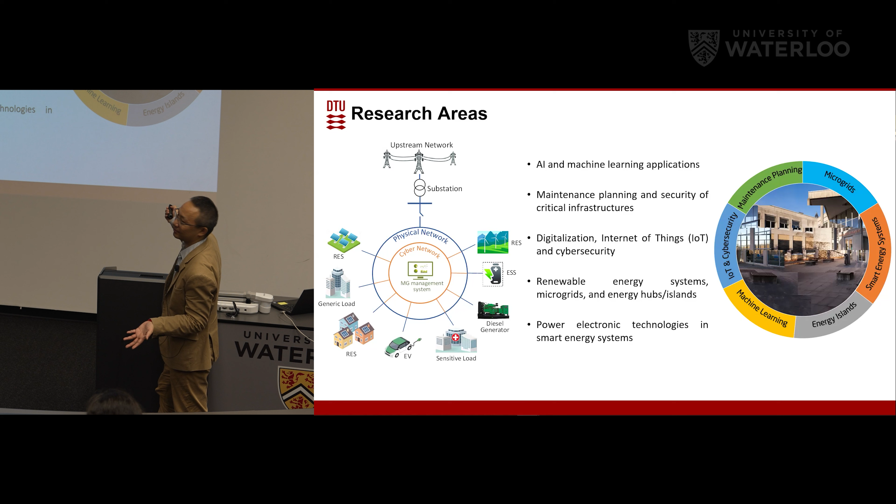For research topics, we are working on machine learning, cybersecurity, IoT, and also energy systems, especially microgrids, power systems, and energy islands. These are some of the topics we are working on.

For Energy Technology, we have 3 labs. One is the power electronics lab. Now we have four 10 kilovolt inverters, we have the DC bus bar and also the AC bus bar. So if you want to do some tests with multi-inverter interaction, operation and control, we can do it on this. This is the future work.

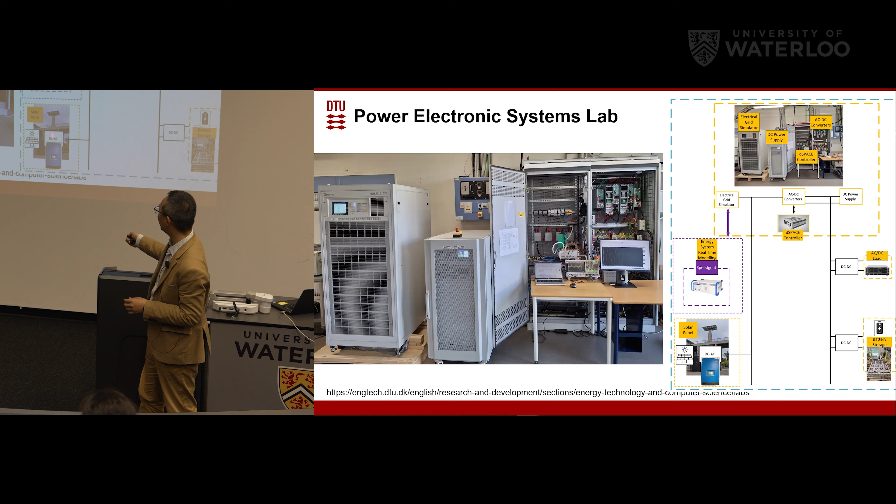We have already set up this platform for these converters, but real-time simulation connecting with them is not ready, though we are planning to do that. That is the PV panel you have seen from the other GIF figure. We plan to connect this PV panel to the grid, and also a storage battery for the bachelor student project, combining them all together as a microgrid to do some tests.

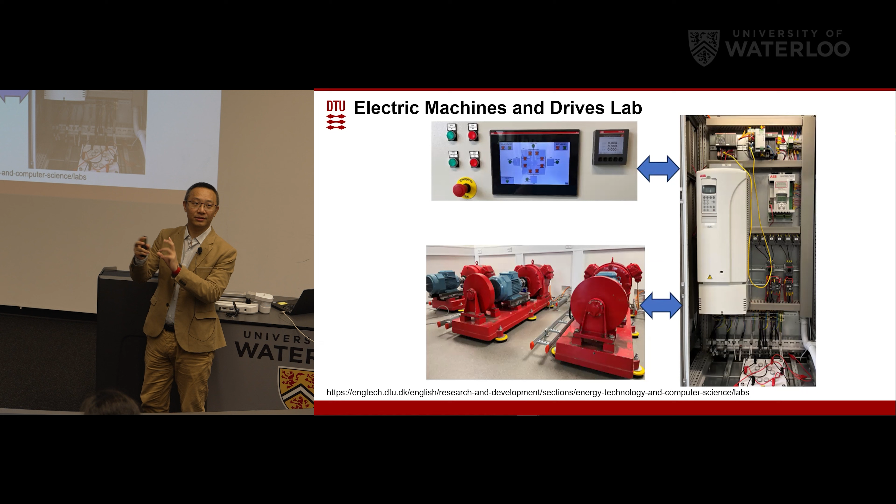Another lab is the electrical machine and drive lab. We have this synchronous machine, mainly for teaching, and the control is from ABB. There are also some small inverters and drive equipment, not shown in this picture, but there are some platforms.

I'm taking over the power system protection lab at DTU in the main campus, where we only have 2 courses for protection. We have some relays from Siemens, but they are all conventional AC system relays, protecting the AC system, bus bar protection, pilot protection, transformer protection.

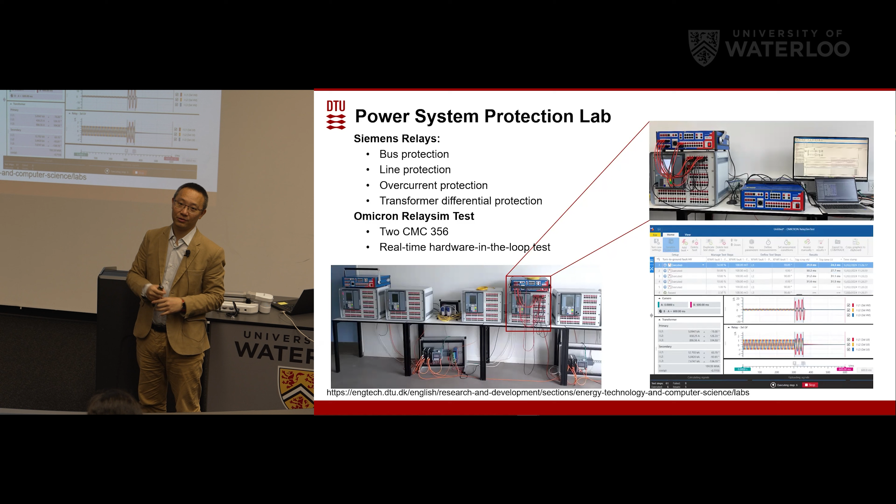We also have this test rig, the Omicron. We can generate the signal and do some tests with hardware in the loop for student projects. For research purposes, I'm working on fault protection for HVDC, but this rig is AC only, so I cannot use it for my research. It's mainly for teaching, company tests, and master or bachelor programs.

Now let's focus on the topics of this presentation. It's not very detailed, specific technical research issues, just the broad picture of offshore wind and HVDC in Europe.

So the first part is the driving force. Why do we need HVDC and wind? Because we want to achieve net zero emission.

In Europe, the UK is the first country, one of the major economies in the world, to launch a 2050 net zero emission target. Net zero emission means you are producing carbon and consuming some carbon, for example through forests or carbon capture techniques. The EU's target is higher than net zero emission - climate neutral means human activity is not affecting the climate. This is much higher.

For other economies, for example China, they want to achieve carbon peak by 2030 and carbon neutral by 2060. The reason is they are still booming their economy, so carbon dioxide emissions are still high. By 2030 they can reach the peak and then decline.

But actually we cannot achieve net zero emission because consumption is still too high. So in the future we have carbon tax - for example Brazil has a lot of forests, the Amazon, and we can use carbon tax credits to achieve carbon neutral. So these are the differences, and India is going to achieve it by 2070.

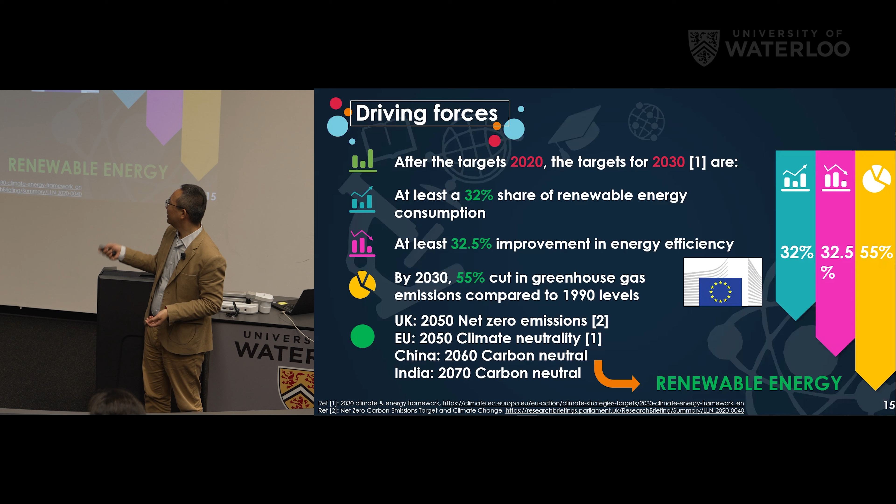So how to achieve it? Use renewable energy. The EU has made a lot of efforts on this - by 2030, at least 55% cut in greenhouse gas emissions compared to the 1990s. And now we have Trump, so we don't know what will happen in the US - maybe they will quit the Paris Agreement again.

For wind in Europe, every year the wind energy organization launches a new report. I keep tracking these reports and updating these slides.

Now in the EU, offshore and onshore total is 272 gigawatts. You can see the total power consumption share from wind is increasing, but we want to achieve 100%. It's still quite low. However, if you check the total electricity consumption, it's declining, so this percentage is increasing. They are compensating because recent years the economy is not very good, so total electricity consumption is not too high and is declining. That's the reason this share of renewable energy is increasing.

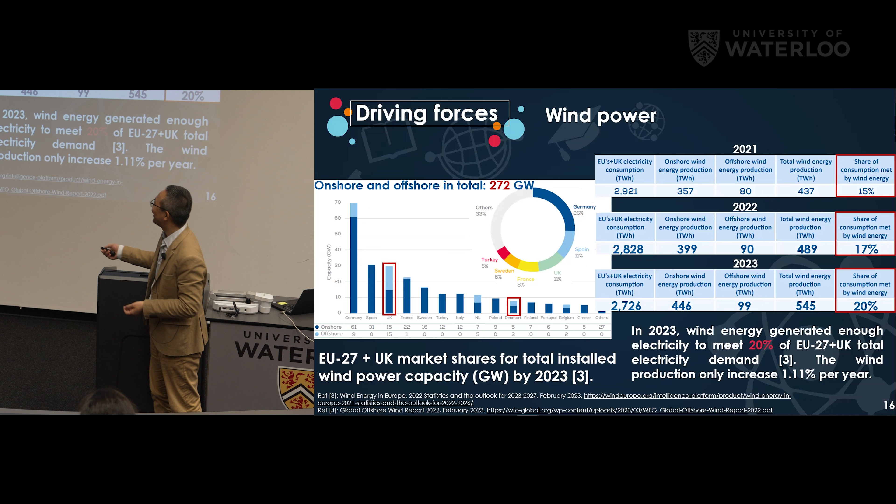Originally this was 28 countries. Since 2016, the UK became independent - we say this is offline or off-grid operation. Now it's 27 plus UK. So you can see they are far away from achieving 100% renewable energy.

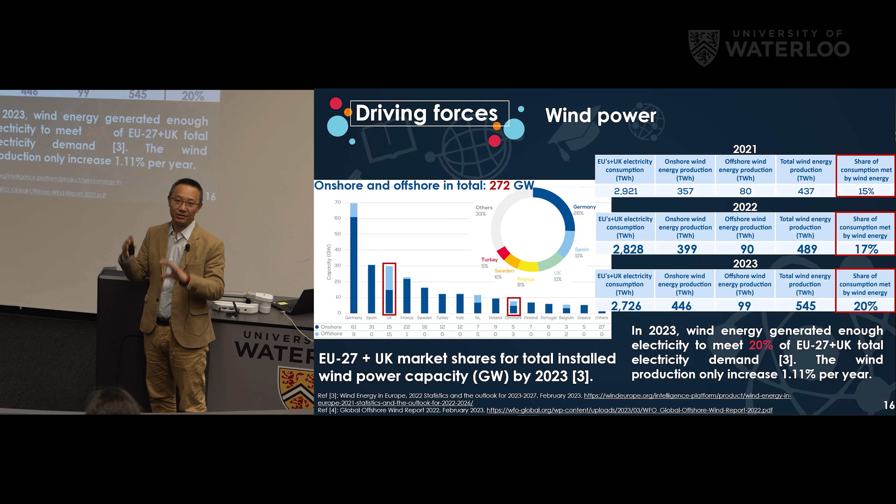In Europe, the weather is not very good. For example, in Denmark, it's always cloudy, so PV is not as prevalent compared to wind.

I think since you are in the ECE department, you know why we need to use renewable energy. But why do we use offshore? Because the wind speed is higher and much more stable.

We can use coal or gas because they are controllable - we can start up or shut down these power plants quickly. But for wind, we cannot control them; we have this problem of intermittence. So if we build offshore wind farms in the sea, we can have higher and more stable output. This is good for our power system engineers.

But the problem is we have so many disadvantages. The cost is still very high, and reliability and manufacturing difficulty is much higher compared to onshore. All these components should be redesigned for the harsh environment in the sea.

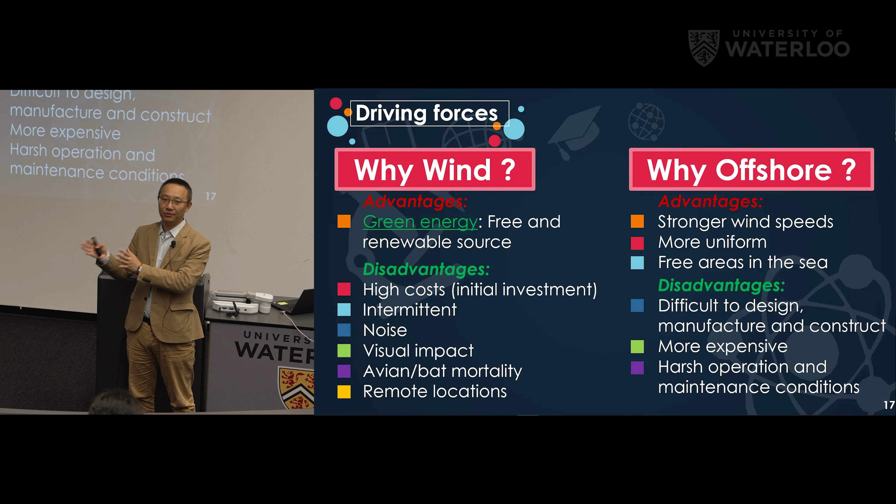Also in Europe, the land is very limited, so we want to build in the sea because that area is free. Even though we have some fishing areas, somehow we can avoid those areas to find a location to build offshore wind.

We want to achieve 100% renewable energy, net zero emission. If we build a lot of wind turbines, we also consume power and produce carbon. Based on the Danish Ministry of Energy, about 90% of materials can be reused. After half a year or one year, we can achieve carbon neutrality - meaning the energy produced by the wind turbine is equivalent to the coal or gas that would have been consumed to generate the same electricity. This one can be neutral. So in this way we can have whole lifetime carbon neutrality.

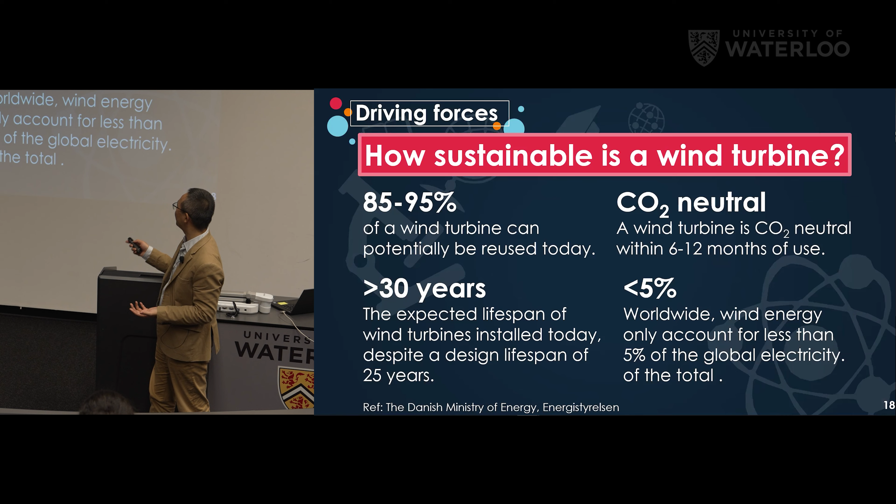Also here is the data - only 5% of global consumption is from wind. So you can see we have very good opportunity and a lot of challenges for us to increase it.

So how can we grab the power from offshore to onshore? Conventionally we use AC, alternating current. But if you've attended power system analysis, we know that with two terminals, two machines, we have the equation P equals V1 times V2 divided by X, times sine theta. If this X, the impedance of the cable - especially for submarine cables - is too large, then P will be reduced.

So we cannot transfer as much power as we want - we have the transfer limitation of AC. How can we solve it? We can use this method for the Hornsea 1 project: we put a reactive power compensation station in between. This reduces that X and increases the distance - over 100 kilometers.

Before 2023, this was the largest one in the world. Hornsea 2, from last year, is now the largest one. It used 174 Siemens Gamesa 7 megawatt wind turbines.

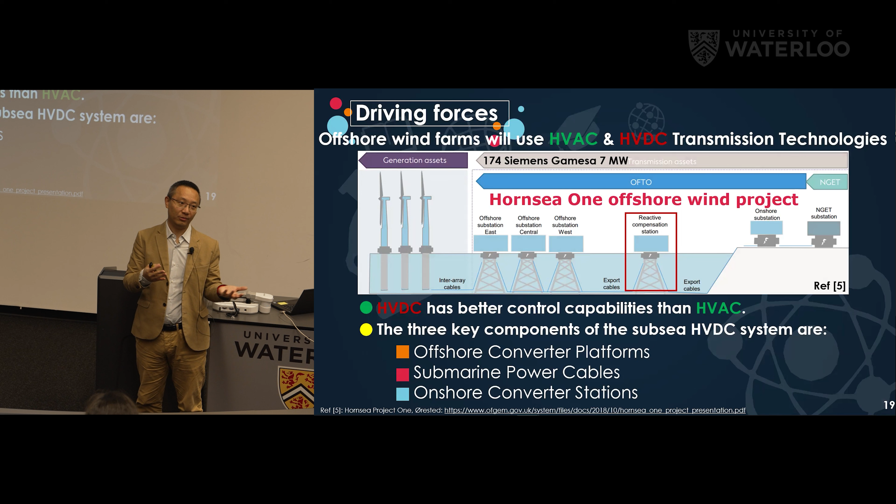The reason they use AC in the UK is that they assume HVDC is not too mature yet. So we are still relying on AC because it has been used for many decades - it's much more mature and reliable, even though it somehow increases the cost. Another way is to convert from this AC sine wave to DC.

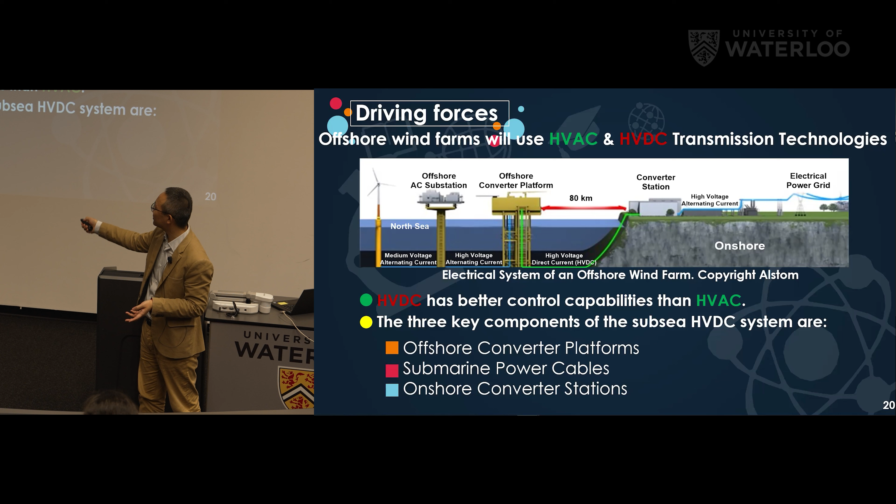If you read some reports for this offshore application, if the distance is over 80 or 100 kilometers, DC is better in terms of cost, losses, and control flexibility. So we convert from AC to DC, and then DC to AC again to supply the conventional AC system. That's the main cause of HVDC, high voltage direct current - we need to use this large HVDC converter station in the sea and also onshore.

So there are many projects in Europe. For example, this is the ongoing one with UK and Morocco - they want to build a 3,800 kilometer HVDC link from Morocco to UK through submarine cables. This is a crazy idea. But originally there was another one called Sun Cable, from Australia to Singapore, which would be more than 4,000 kilometers. But this one is postponed already.

But the Morocco-UK one is still ongoing. Some of our friends are working for this consultancy company and the National Grid UK - they are still working on these projects. Yes.

And then some cases in Europe - UK is the largest market in the world for offshore energy systems. So since...

1990s, they launched this round 1, 2, 3 scheme. Each round is 10 years - they started to build pilot wind turbines on the seabed, small wind turbines for offshore wind application, and then gradually increased distance by the 2000s. They already have some long distance offshore AC-based wind farms. So they want to achieve net zero, which means they need to build a lot of wind turbines.

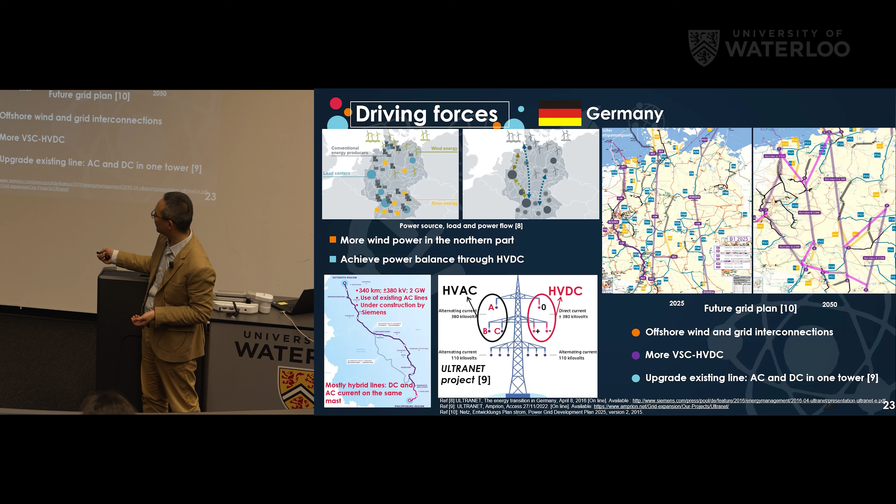But this project, UltraNet, was planned in 2013 when I started my PhD. But until now it's not commissioned yet - they promised to commission it in 2026, okay, 2 years more.

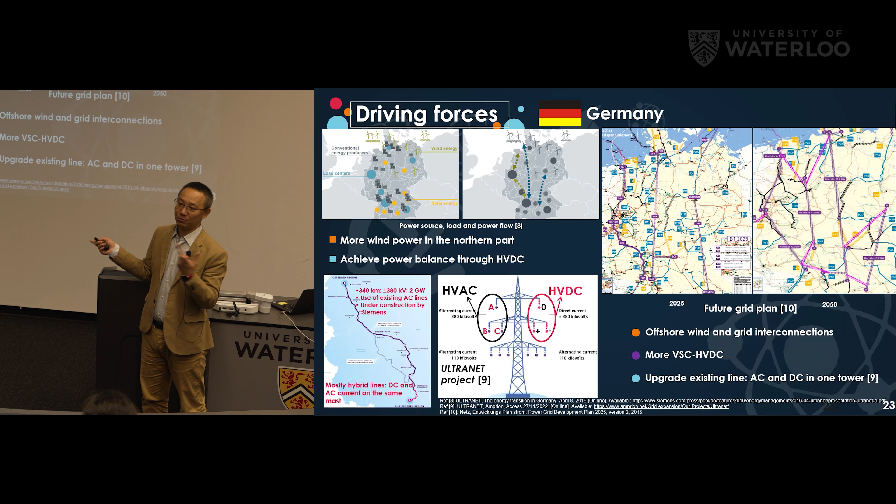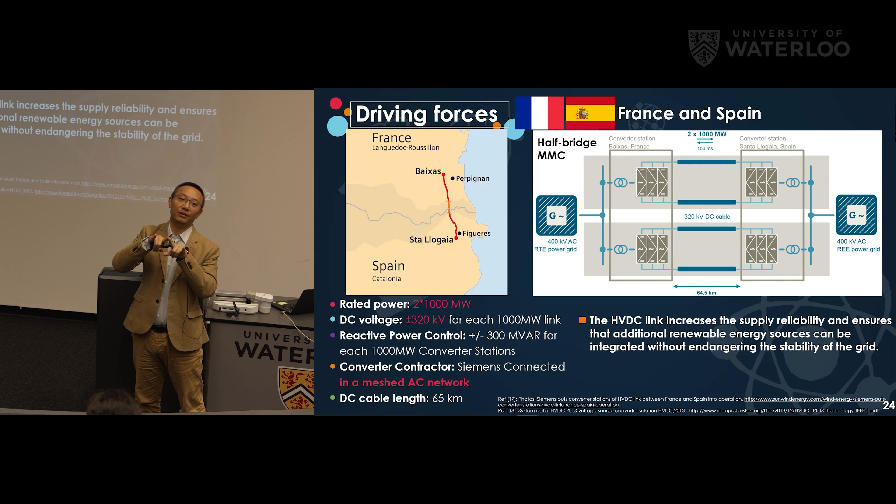And then France and Spain - this is one example in the early stage. For this project we have a 2 gigawatt transmission requirement, but at that moment this HVDC cable could not reach more than 1,000 megawatts. So in this way they built 2, 320 kilovolt cables in parallel operation. But now we can have this bipolar configuration - directly use one pole, another pole, and remove the other 2 poles, so we can reduce the cost. But at that moment that was challenging.

And this was the first AC system embedded HVDC link. So you can see this is not connecting from this offshore wind farm or renewable energy, PV or wind - they are embedded between 2 AC grids. Yes.

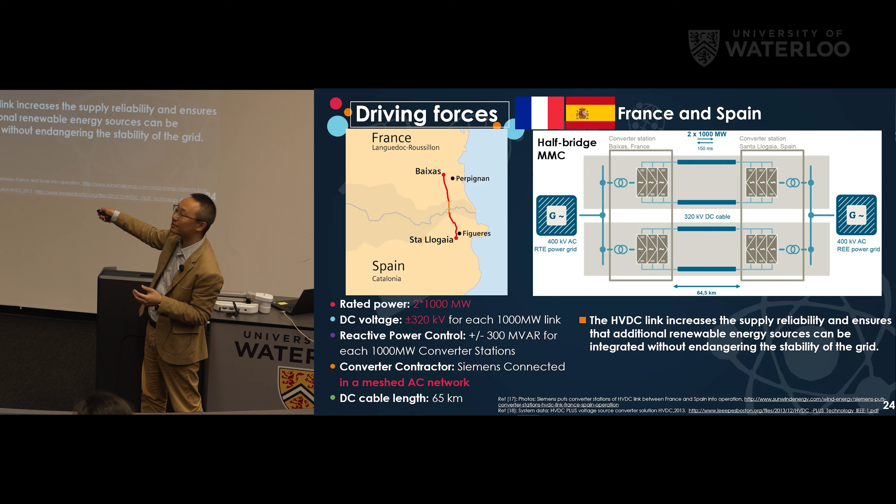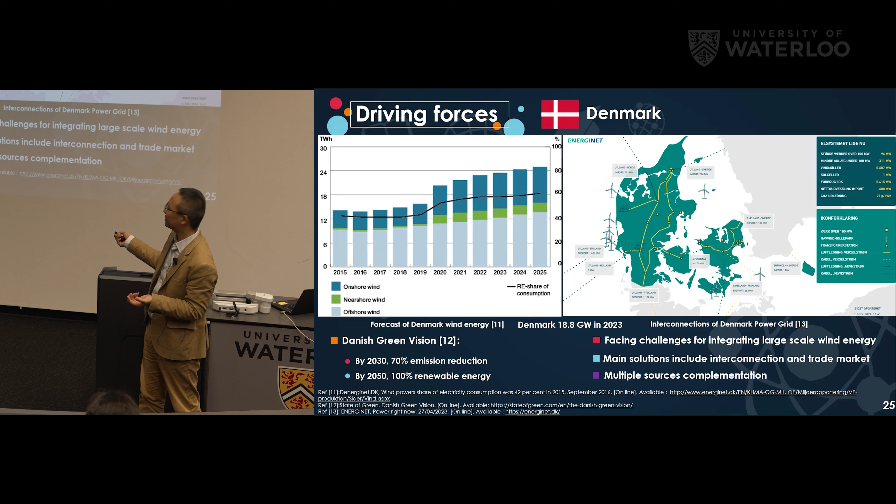In Denmark, we want to achieve 100% renewable energy by 2050. But Denmark is a small country. The total installed capacity is only 18.8 gigawatts as of last year, so it's very small. Now we already achieved more than 60% installation from wind. According to a report from the IEA, International Energy Agency, Denmark is reaching phase 5, meaning we already achieved a very high level of renewable energy penetration.

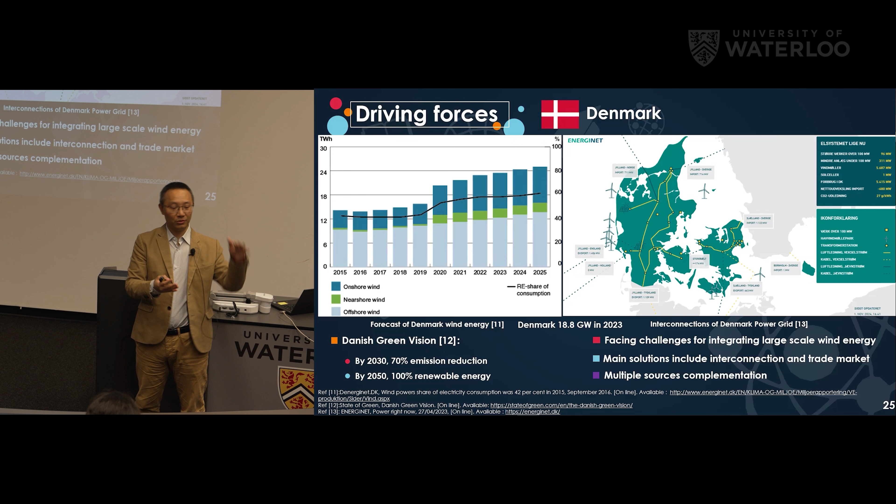The reason is that this small country is like a big microgrid. They have interconnections with neighboring countries. In case of emergency support or fluctuation from wind, we can use the HVDC's fast control to mitigate or compensate for this power requirement. We can also use economic methods - for example, if the wind is too strong and we have too much output, the electricity bill can go negative, and customers can use more of their loads to compensate for this power imbalance.

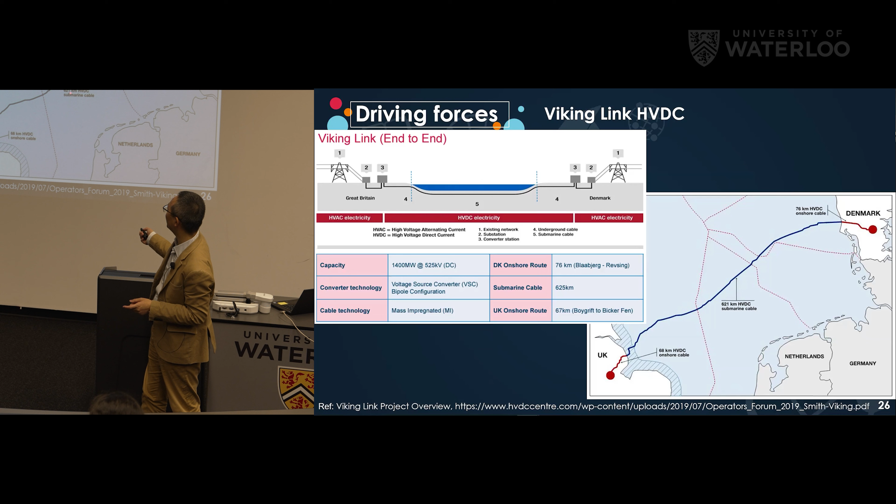This is the link called Viking Link between Denmark and the UK, and this is its roadmap. This is the longest one, a submarine cable of MMC-based HVDC. The submarine cable is more than 600 kilometers, plus some onshore cables in the two countries, so in total it's more than 700 kilometers.

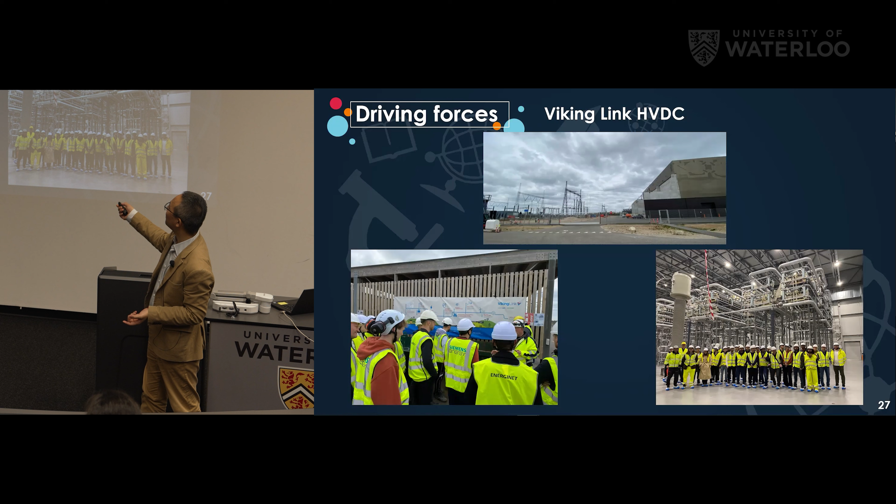I have some figures here. In my course, we organized a visit to this Viking Link. At that moment it was not commissioned yet, which is why we had the chance to get into the converter station valve hall. There was no electricity at that moment, so we could even touch the devices.

When I organized this visit, I asked the students to ask the chief engineer or staff there why we need this link between the UK and Denmark. The chief engineer said because Denmark's electricity bill is lower than the UK's, so we can sell electricity to the UK and earn some money. Also, since Denmark has such high renewable energy penetration, we can use it to mitigate fluctuations from wind.

We also asked if there could be support from UK to Denmark. Yes, the answer is yes - we can do power reversal from UK to Denmark if there's some emergency support or requirement.

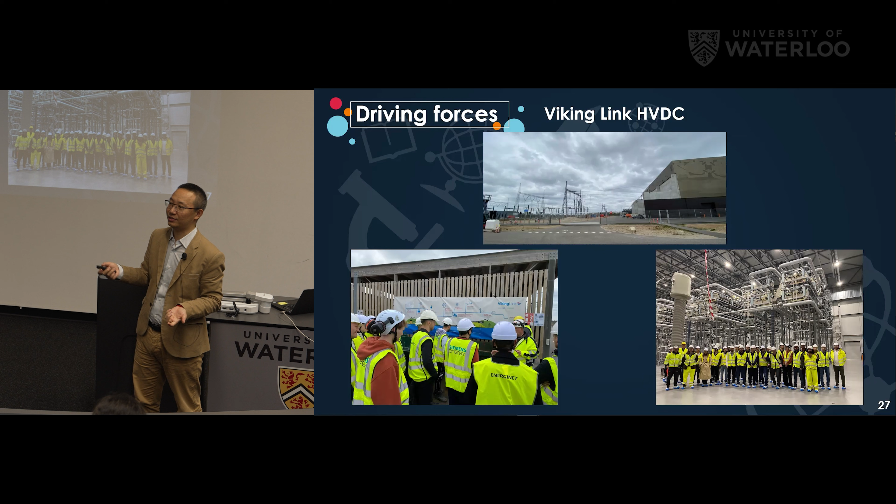I communicated with staff from Energinet and they said it's not them who wants to build this - it's the politicians, the government, who want to do that. In Denmark, Energinet has no researchers - there's no research center or research institution inside the company. So since 2020, they've recruited a lot of PhDs and postdocs focusing on this.

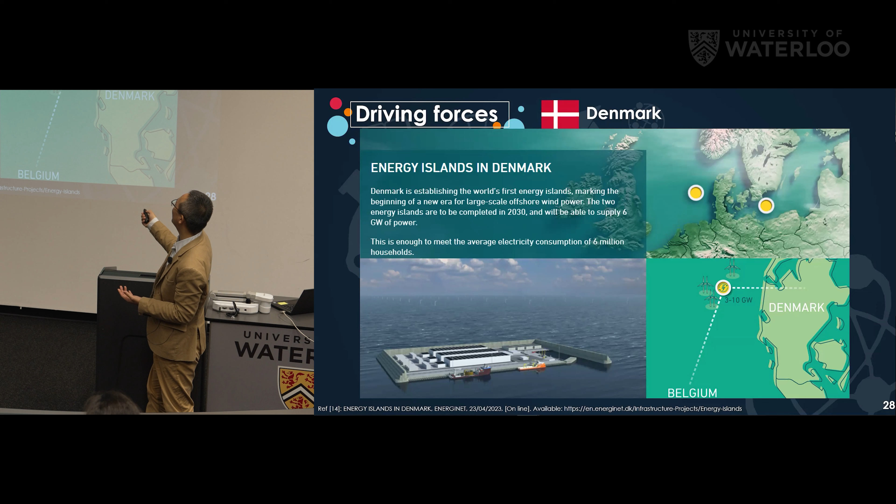The total cost of this project is 200 billion kroners, Danish kroners, divided by 5 - that's about $40 billion. A lot of money. This will be the largest construction project in Denmark's history. But now they've already postponed it because it's way beyond budget. However, the real island, the Bornholm Island, is still ongoing. I'll talk about this later.

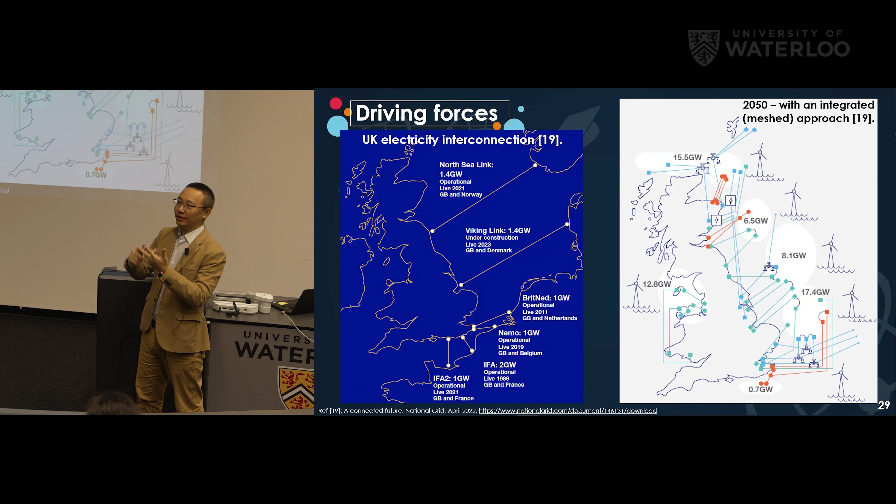This is the link to the UK, and the next logical step is to interconnect these links together into a meshed grid. Because with a point-to-point link, if we have a fault, we lose the power transmission. But with a meshed grid, if we lose one line, the power can still somehow transfer to the other parts of the system. So we can increase control, protection, and flexibility of the system using this HVDC grid.

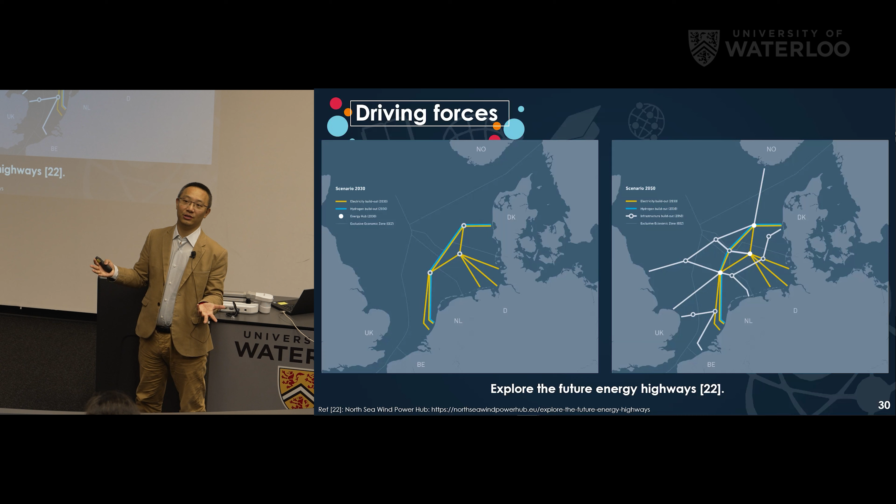There are some other regions with this kind of DC grid. The small circles are energy islands as well. We can have a large scale North Sea DC grid. We can also call this a kind of super grid, but this super grid is not that kind of super grid - this is just a name proposed back in the 1990s.

In Europe, the backbone AC transmission system, 400 kilovolt AC, took 8 decades to build, so it's a long period. For DC, we also need to spend a long time as well. Also regarding this name, Supergrid - there was an organization called Supergrid, Friends of Supergrids, but now this consulting company has already changed the name to Friends of Sustainable Grids.

They changed the Friends of Sustainable Grid, so this concept is not used anymore. So what do they plan to do? To transfer the solar energy through HVDC to Europe, and also build many offshore wind farms in the North Sea.

You can see there are some motors here, meaning that in Norway, more than 90% of power is generated by hydropower plants from water. For water, you can just spend 3 minutes to start up or shut down the power plant. So this kind of power generation from a pump hydropower plant is very fast and flexible to control. It's a kind of energy storage that can also compensate for fluctuation, intermittence, and uncertainties.

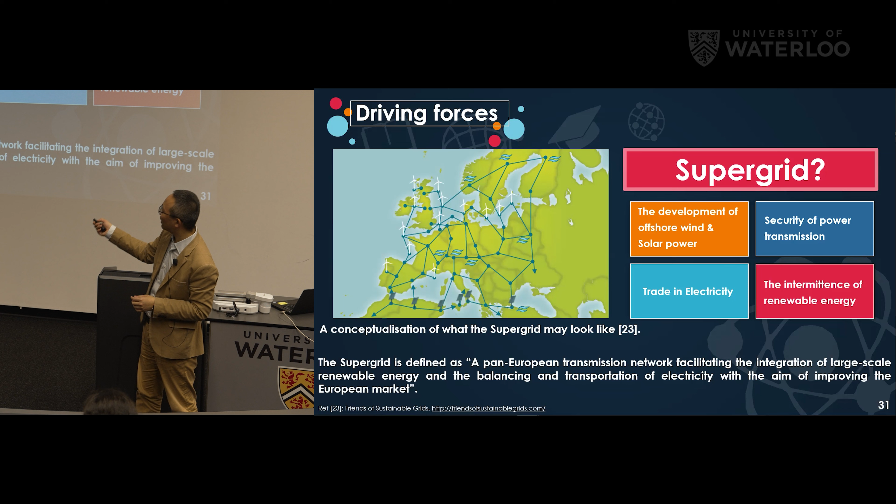So in this way, we can have this very large scale DC grid. So we have the ideas. So how can we do it?

There are many challenges. For example, the cost is very high - you need to send people by helicopter or boat to fix any problems there. And with these blades and all this construction, if you rent a construction vehicle and suddenly there's a storm or rain, you need to stop it. So one day you can lose maybe hundreds of thousands of euros - 100,000 euros in one day. So that's another challenge, and the cost is very high.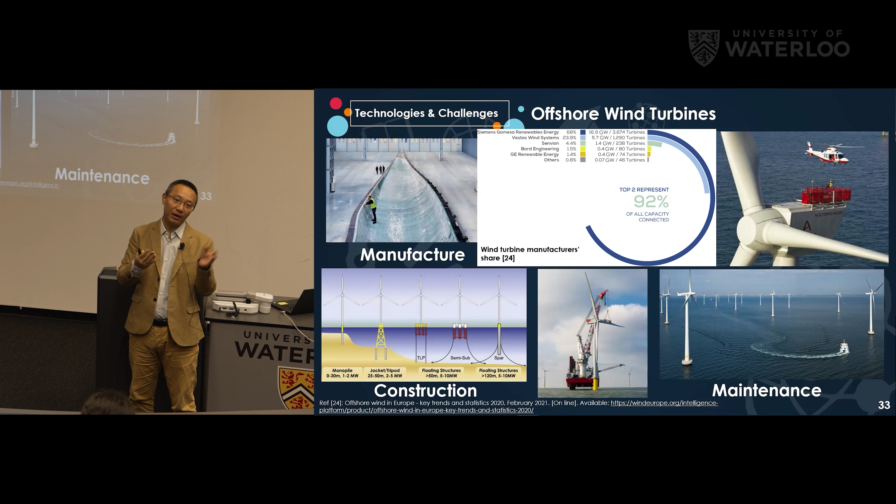I remember reading a report from Siemens that by 2030, the cost will be lower or matching the same as onshore wind turbines. So how can we achieve that? Because we can build giant wind turbines.

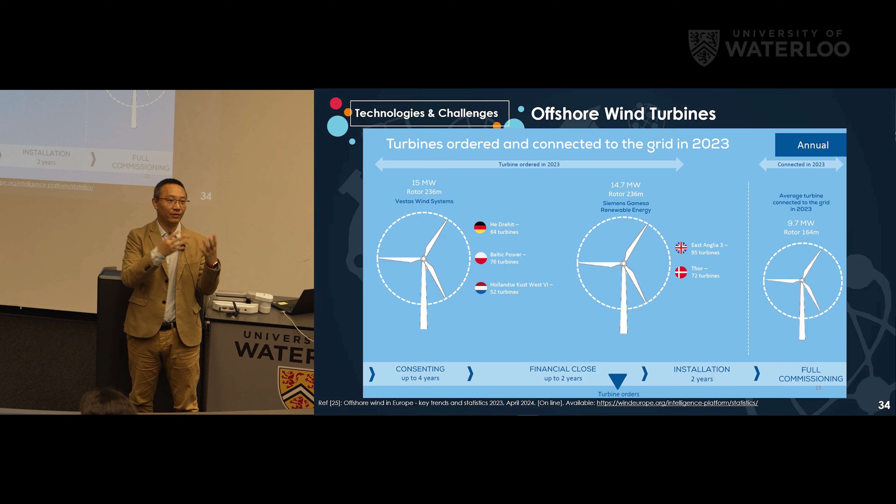I'll show you that Hornsea One - we use a 7 megawatt wind turbine, single wind turbine. But now in Europe, Vestas can build a 15 megawatt single wind turbine, and also Siemens Gamesa. The diameter is about 200 meters, very tall. In this case, if you originally built 1 turbine, 2 turbines equal 1 in terms of efficiency. So you save money on construction and maintenance. But the more you combine them in series or parallel, the higher the possibility you lose them, because there are always failures in the components. So in this way, we can reduce the cost.

This is news I read recently in an HVDC newsletter. In China now, there's already a company called Dongfang Electric that produces a 26 megawatt wind turbine, a single turbine - a super giant wind turbine. This is really hot news, but I don't know when they will put it into the system for operation.

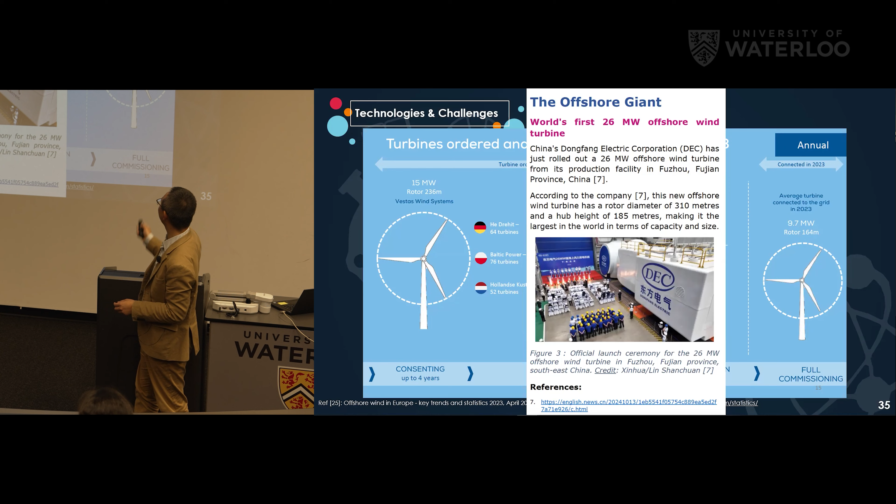These are the data from these 2 companies, Siemens Gamesa and Vestas - very high, more than 200 meters. This is Denmark, this is in Danish, I don't know how to read them.

So you can see this one here. You can see that on the top, the wind is very, very strong.

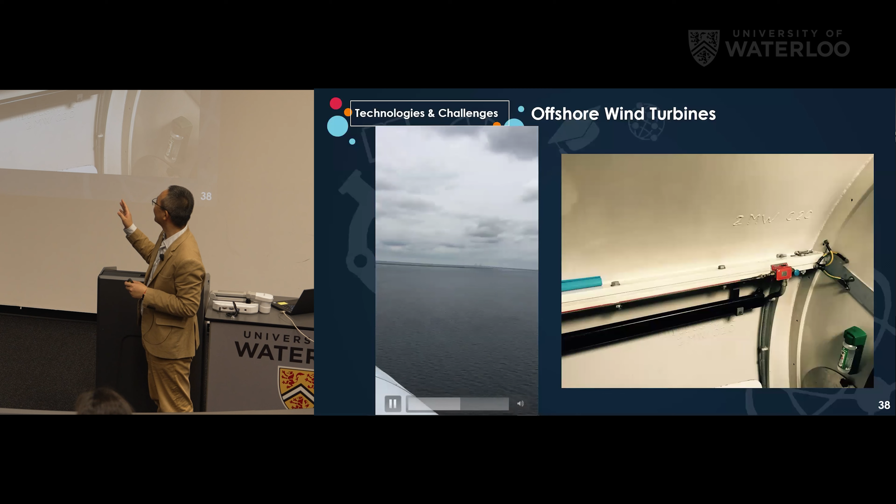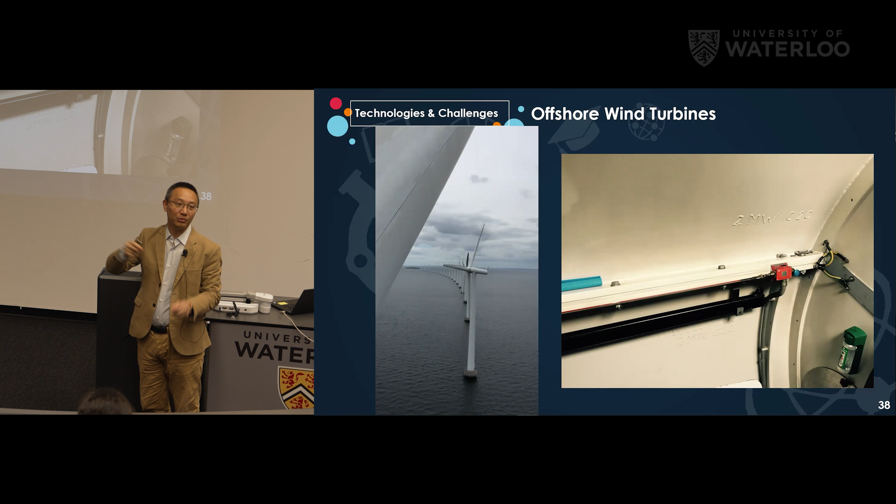And by the 1990s, you can see the data - I just took that photo because I wanted to remember this. This single turbine is just 2 megawatts. So you can see in the past decades, the technology developed very fast, already reaching even 26 megawatts for a single turbine.

Here, yes, if you enter the inside of this column, you can see this climbing mechanism. About every 10 meters, there will be a hole, and then a plate that rotates by 90 or 180 degrees, just in case you fall, so you're not falling from top to bottom. So that is the technical know-how - if you don't work there, you never know these kinds of things.

And this is our team, at the DTU Risø campus - that's the wind turbine. In this Marie Curie project, there are now figures in this field of HVDC and offshore wind. Arta, who isn't in this photo, is now the senior vice president of Siemens Gamesa in Spain. Kevin is now a senior engineer, and JC is a senior engineer in Hitachi - he's in Germany, while the other is in Denmark, and Mark is a supervisor at UPC. April is also a principal engineer at Vestas, and TB is now an associate at WSP, a consultancy company.

But recently, since the 1990s, a professor from McGill University proposed VSC, voltage source converter based, using this so-called IGBT, this new switch. This one is fully controlled, can be shut down and turned on by your control.

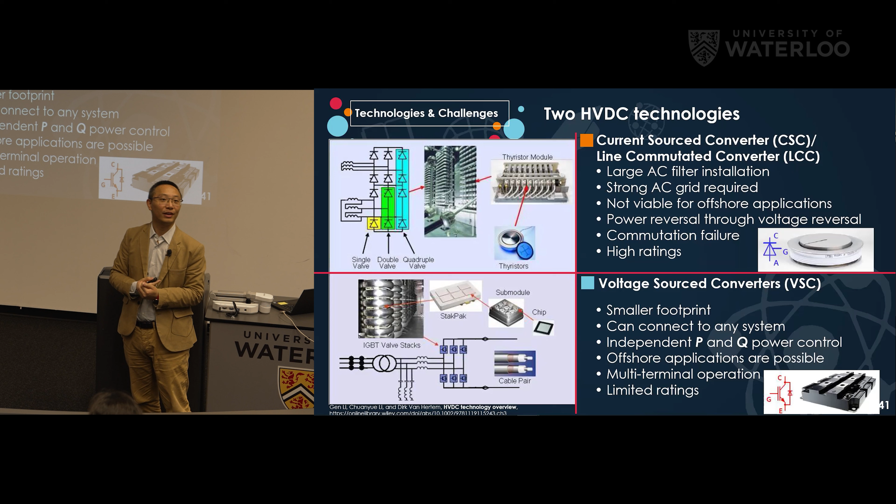But for this kind of LCC, you will use a large switch yard and also the AC filter yard. This one is the line commutated converter, or current source converter.

This is the development of this market, the highest voltage level and capacity we can achieve in the market. So for the LCC, we already achieved plus minus 800 kilovolts, or plus minus 1100 kilovolts.

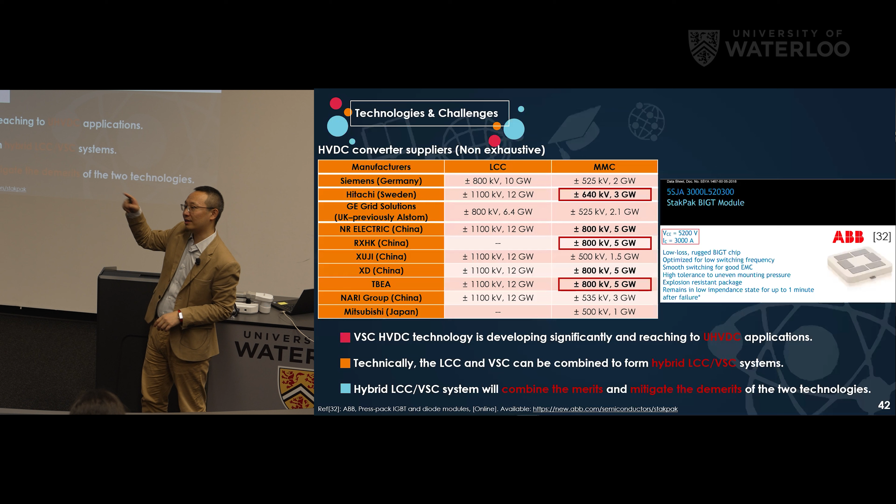There are some companies that can produce this MMC up to plus minus 640 kilovolts. And also for MMC, there are some projects in China where they have a lower voltage valve and higher voltage valve, using two valves like the LCC one, to build up the voltage to plus minus 800 kilovolts. And now ABB has already produced this chip, this IGBT, 5.2 kilovolts and 3 kiloamperes. This is the largest one, the highest capacity and voltage.

Yes, this is another thing called Tennet. Tennet is the system operator in Netherlands and also part of Germany. They are now promoting this Tennet 2 gigawatt standard offshore HVDC program.

So they use this plus minus 525 kilovolts, and everything will be modular. They have the same application everywhere, using this kind of module. The total transmission power will be about 2 gigawatts. So they say they will build more than 13 projects using this technique by 2030.

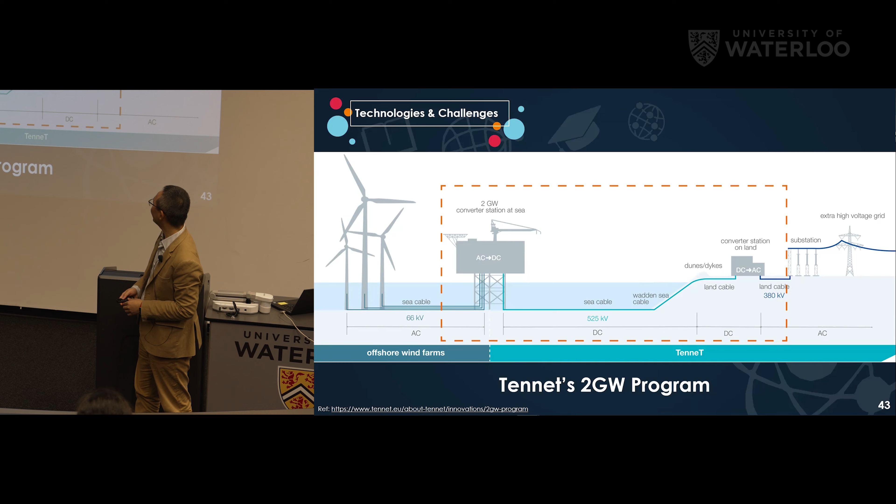DC-DC transformer. So as I mentioned, we will have this DC grid in the future, but it's not like AC. We have the AC transformer which can change the voltage levels easily. But for DC, it's not that easy. That's the reason DC is not the dominating electricity in the world at this moment.

Edison proposed DC, but if you want higher voltage, you just need to build a larger DC generator, but it has physical limitations. Then Tesla proposed the AC transformer, so we have AC. We can easily change the voltage level and have long distance transmission. But for DC, we cannot easily change it.

So we need to propose this so-called DC-DC transformer, or solid-state power electronics transformer. There are many topologies in the literature, many designs, but there is no one used in HVDC application yet. Because this is not mature, the cost is very high, the reliability is very low, and the fault ride-through capability is low as well.

Because with this IGBT, these power electronic devices, if there is a fault current, the current can immediately reach more than 2 times the standard current. So this can burn the device. So it will be blocked to protect itself. But then we have no fault ride-through capability. So these requirements and limitations are restricting this DC-DC transformer, and therefore we have no DC grid yet in this HVDC area.

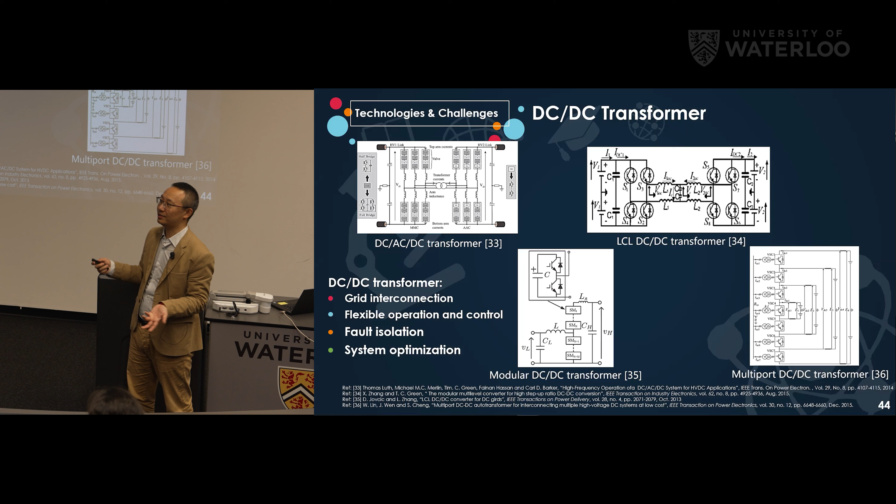And for DC protection, we also need to break up DC fault current. For AC, it's like this: we have this so-called zero crossing. If you draw this sine wave, at this crossing, you can use the breaker to break these fault currents, the arcs.

But for DC, it's constant. Once there is a fault, the current directly goes to 20, 30 kiloamperes in HVDC application. But there is no zero crossing, so the arc cannot be easily interrupted. So we propose this hybrid one, or power-electronics-based one, using these power electronic devices to interrupt it. But this DC breaker will be very, very expensive.

ABB, now Hitachi Power, launched this hybrid DC breaker in 2012. But until now, they haven't sold any breaker in Europe or in the world. So this is not mature yet, but it has been used in China's Zhangbei project, and both types have been used in China.

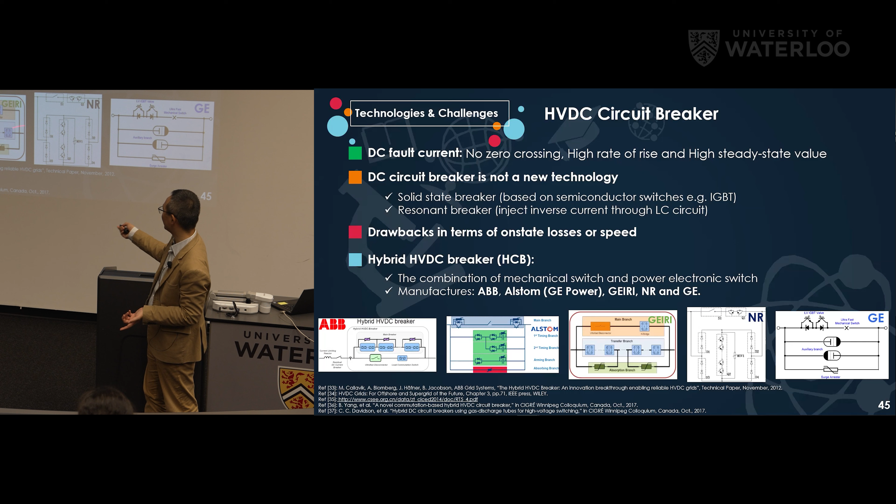For AC fault protection, the transformer has impedance or reactance, which can limit the rate of increase of fault current. But for a DC system, we do not have such large inductance, so it's not easy to limit the fault current increasing speed. So we need to propose fast and reliable fault protection schemes.

As I mentioned, DC breakers are very expensive. So how can you reduce the cost while at the same time achieving fast protection?

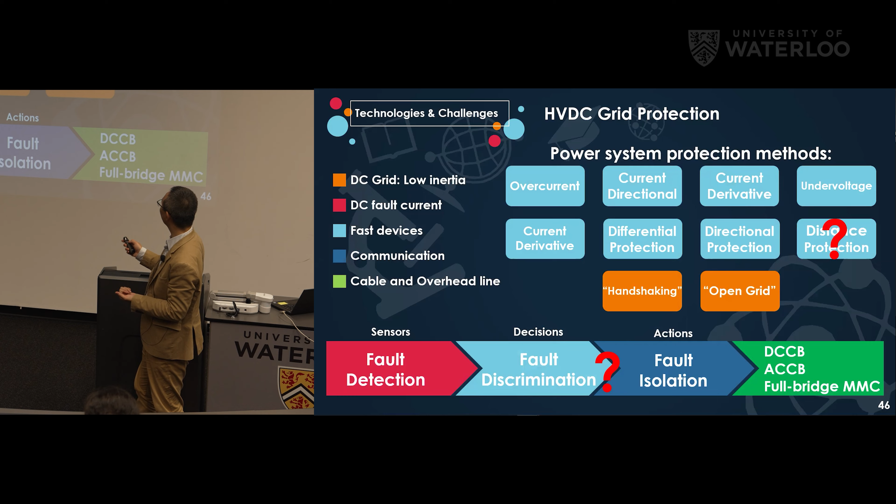Some other techniques for AC and DC. Recall the equation P equals V1 times V2 divided by X, where X is related to J omega L, and omega is the frequency of the system. So if we can reduce the system frequency, for example to 50 by 3, we can reduce X by 3 times, and increase the power transmission capability by 3 times.

This is not new. In Germany, some railway transmission systems use 50 by 3 hertz for medium voltage, for example 20 kilovolts AC but at 50 by 3 hertz. We can use the same technique for high voltage AC transmission.

But the problem is that once the frequency is changed, the AC transformer should be changed as well. We need a low frequency AC transformer, because the flux phi is related to the frequency F. So if the frequency is reduced, you need a bigger core column in the transformer to maintain the same flux. The transformer will need to be newly designed.

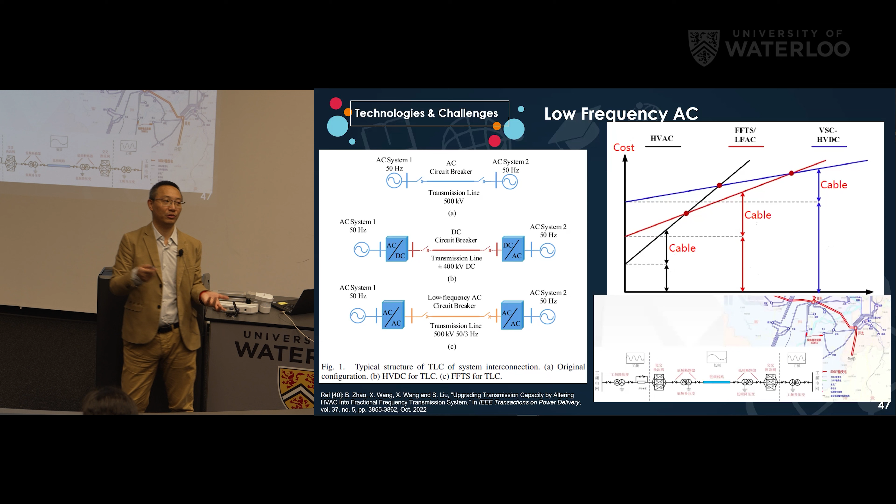Based on some analysis, for this low frequency approach, up to 180 kilometers it performs better than HVDC. So it means that for distances less than 180 kilometers, low frequency AC is much better compared to HVDC. But the problem is that low frequency AC is not mature technology, so no one wants to use it. It's not widely applied.

There is only one project in China - a demonstration trial application. One project, connecting to the 500 kilovolt original AC grid.

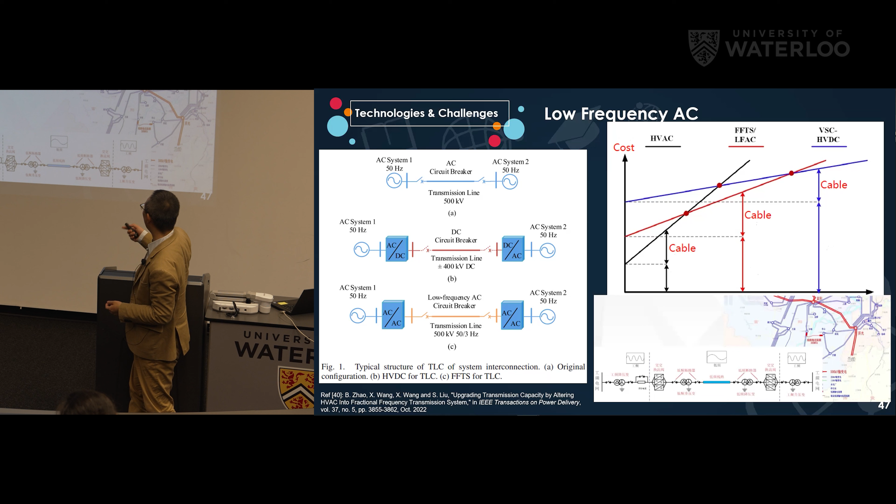They will install 6 gigawatts of wind by 2030 - an additional 6 gigawatts.

So this is one case, like the HVDC case I showed. We have some wind farms, and we can connect these wind farms together - this is called an AC collection system. Then connect to one HVDC converter station, and use HVDC to transfer the power to the onshore grid.

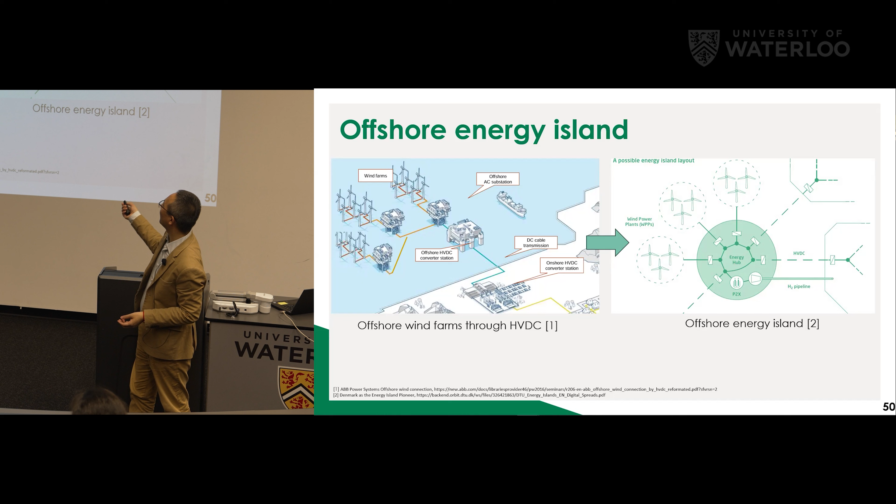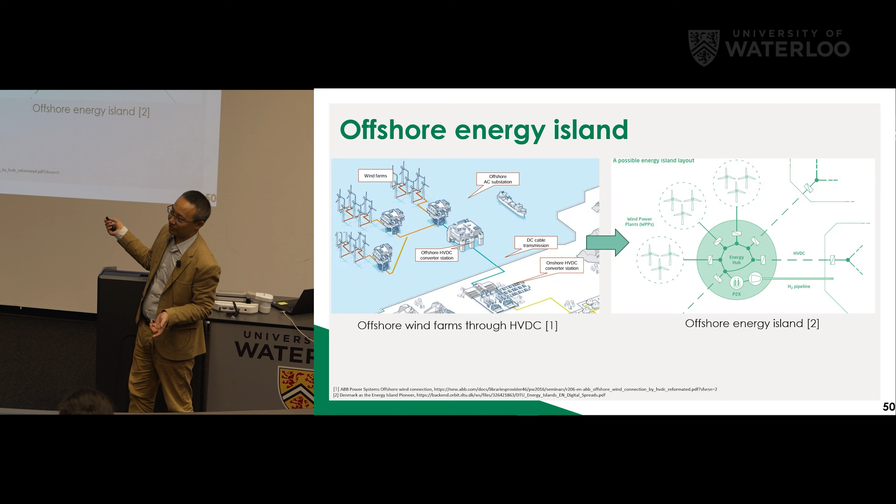But if we have so many offshore wind farms, can we find another way to collect this power? For example, we can collect these wind farms as one node, say 10 gigawatts together, and then through this AC bus bar, convert it back to HVDC and send it to neighboring countries. This concept is called an energy island or energy hub - because it's in the sea, they call it energy islands.

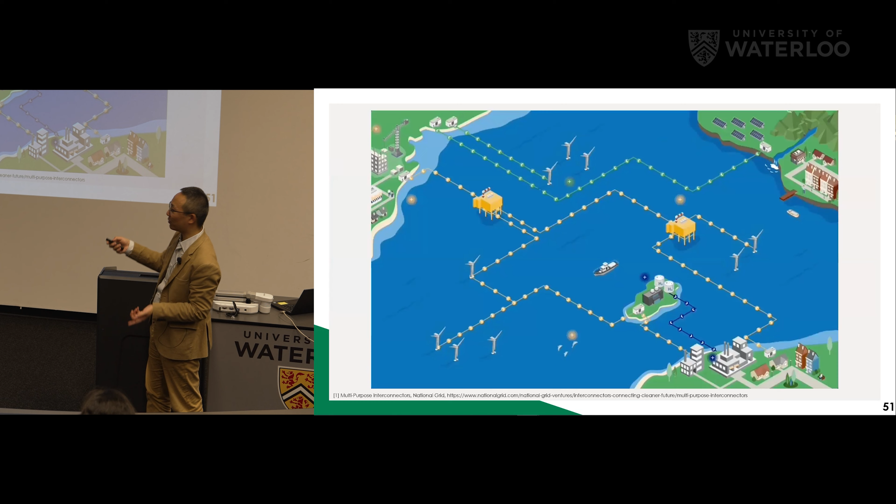Why do we want to achieve this? With an energy island, we can better use the power from wind, because sometimes our grid cannot accept so much power. And for AC, we cannot store it, because at this moment we have no large-scale energy storage devices.

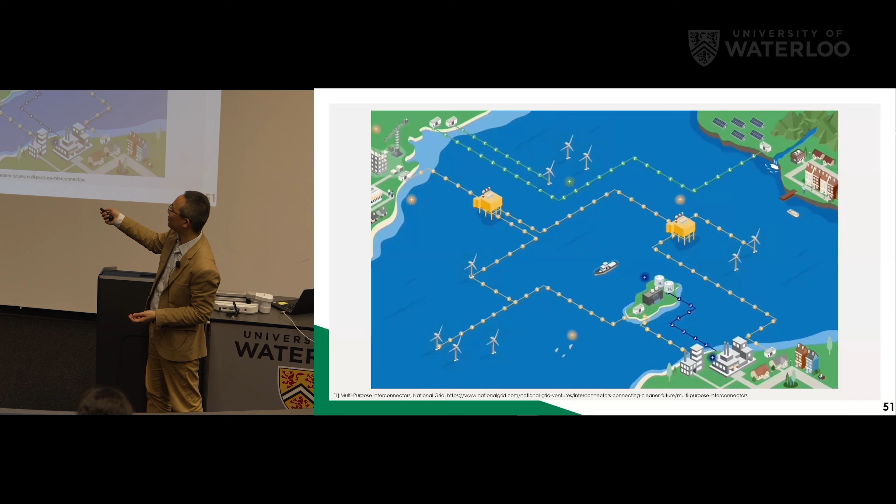So we can use the surplus power to generate hydrogen or ammonia. In Denmark, they call it power to X. We can use this power to generate hydrogen, send it onshore, and at the same time connect with other countries to balance power transmission. So we can increase power control, flexibility, and efficiency. There are many benefits.

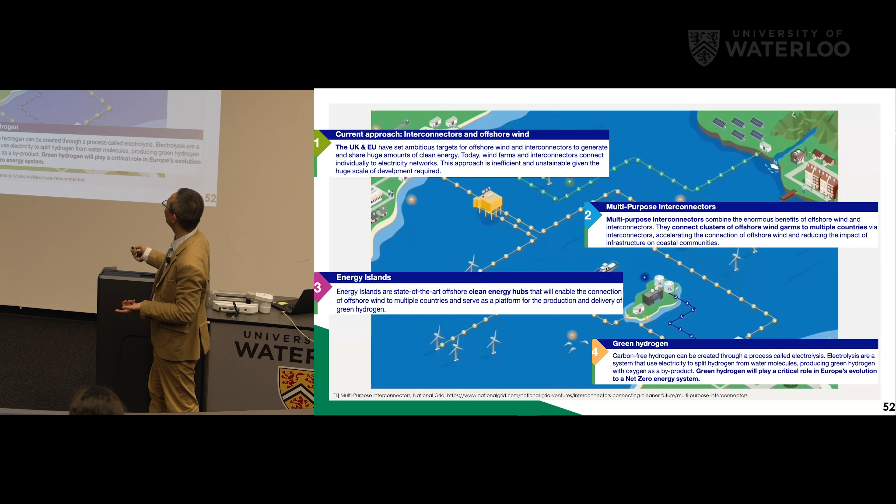These are the plans, two from Denmark - one is artificial, one is real. But last year and this year, Belgium's system operator, Elia, proposed an energy island called Princess Elisabeth Island. They also want to build one.

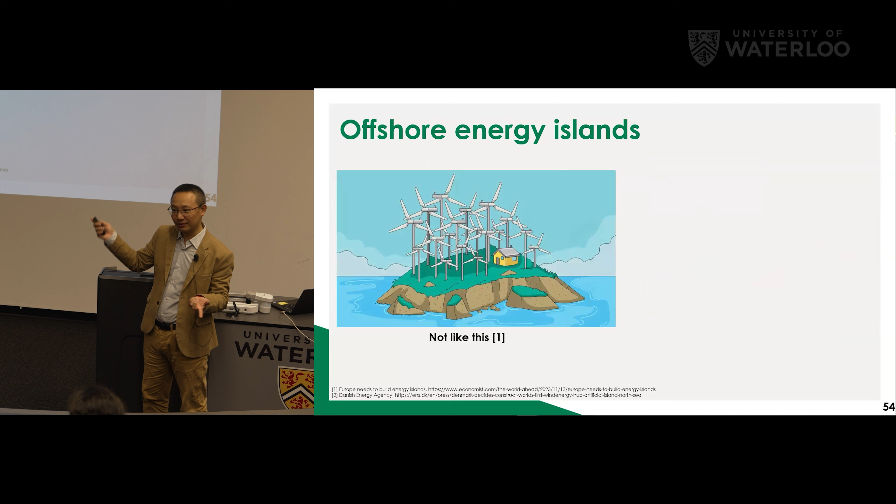Then how does this offshore wind energy island look like? It's not like this - we're not building an island in the sea and inserting wind turbines on the island. Actually, we are doing it like this: the wind farms are in the sea, and we collect the power on this island.

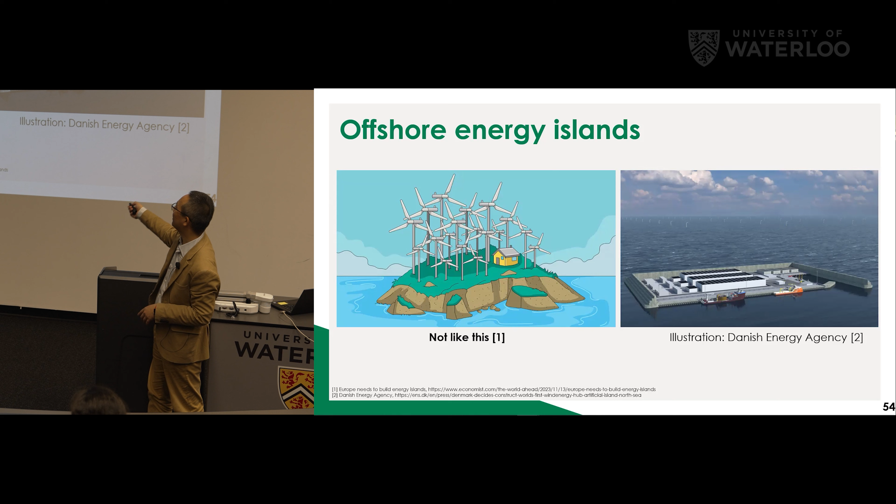I talked with other colleagues from EnergiNet. This one is still ongoing - the artificial one is postponed by the Danish parliament beyond the budget. So this is the real one, called Bornholm Energy Island.

This is a small island below Sweden, but it belongs to Denmark. On this island they already have some renewable energy - some wind turbines, some PV, and also some power-to-X devices there. But they still want to connect more offshore wind farms to this island. At this stage, they are planning to build 2 or 3 gigawatts connecting to this island, using 2 separate HVDC links.

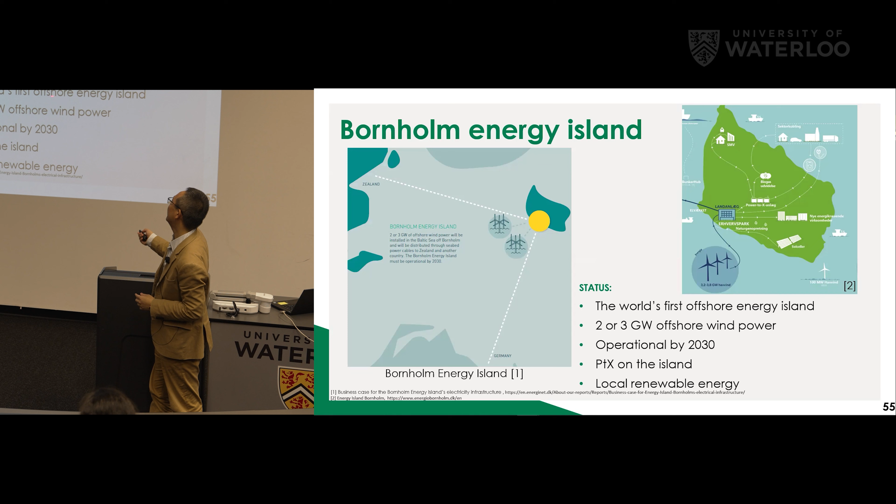This one will be the first offshore energy island in the world. Because that artificial one has been postponed, this Bornholm energy island will become the first offshore energy island in the world. They are competitive, even though this energy island will connect to Germany in the future.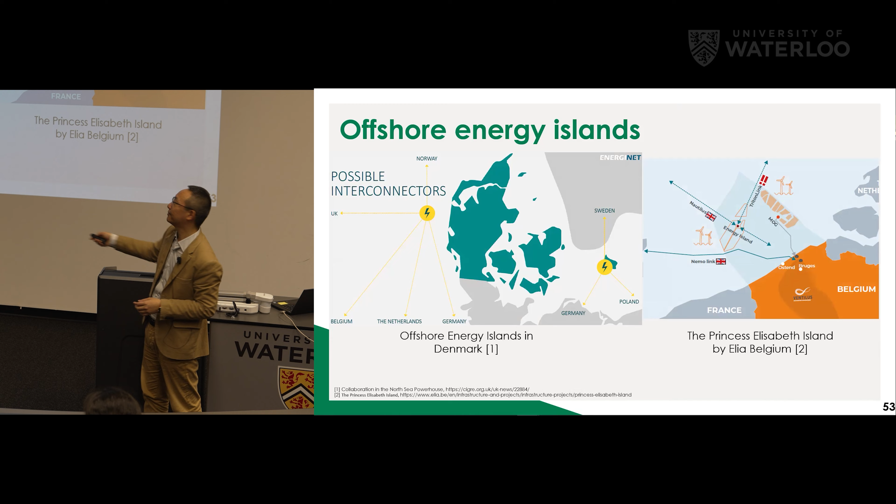Yes, this is the artificial island. You can see that the wind turbine is still in the sea. So we have these 3 gigawatts, for example, because this is too high capacity.

So they need to boost up the voltage to 400 kilovolts to reduce this current. Otherwise you have more than 10 kiloampere currents - you cannot operate at that high current. So the voltage will be very high in this AC bus bar.

So they connect this AC cable to this offshore converter and convert to DC. And this is the DC bus bar because we have multiple links - in the future we can connect them together. And to protect the system, we have this DC breaker installed on the island. So this is DC, the power goes to other countries. So this is the concept.

In the long term it will be 10 gigawatts. From the reports from EnergiNet and DTU, they say if there's a fault occurring on this energy island and you don't protect it properly, you will lead to a whole power outage in Europe. So our duty for protection is very challenging and important.

This is the original concept. I talked to the staff working at EnergiNet - they wanted to build even a hotel on that energy island, but after calculation this is too expensive. So they simplified it like this: only the necessary devices - power-to-X, the hydrogen electrolyzer, or the energy storage battery - will be installed there.

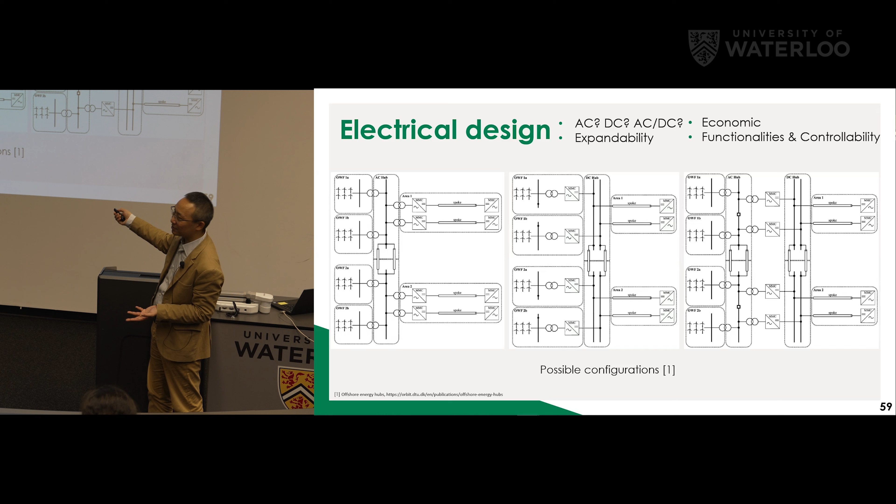So we can use this hybrid AC and DC - first we have an AC bus bar and then a DC bus bar. Finally they calculate everything and they say okay, this hybrid one will be better, in terms of operation, control, protection, and costs. This is the AC bus bar at 400 kilovolts, plus minus 525 kilovolts DC.

In the future, we have one energy island, and we can also connect it with Denmark's energy island, with Belgium's energy island, or even in the future UK's energy island. So we can connect them together, but the distance is too long - we cannot connect them with AC submarine cables, but we can connect them with DC. That's the reason we connect them through this DC bus bar. That's the main reason.

And that is the vision. If we can achieve such an interconnected energy island in the North Sea, we can achieve this super grid. But at the same time, you can see there are different colors. They also generate hydrogen, which can use another kind of pipeline, a submarine pipeline, from this energy island. The yellow one is the electricity. So we'll see whether we can achieve it in the next decades.

Technical challenges. This is the most important thing for this energy island. Stable operation - even though we have mature control for offshore wind farms from existing methods, for a 10 gigawatt pure wind farm it's still very challenging. You may have unstable operation points. You lose stability at some operating points. So you need to solve them.

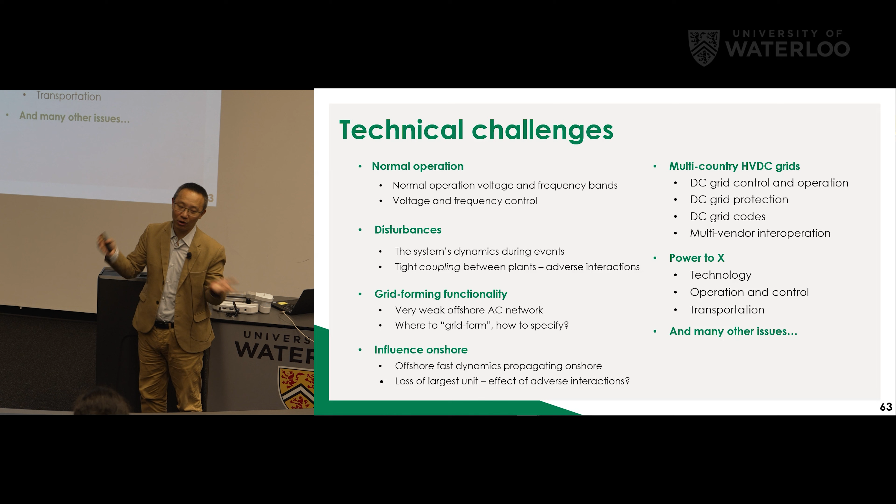And also power to X. Hydrogen is a very hot topic as well, now not only in this power system but in the energy system. So we need to propose ways to generate hydrogen or ammonia, and how can we transfer them from the energy island to onshore - pipeline, or use cargoes and ships to transfer this power. And how can we generate power on the island, or distributionally generate the hydrogen? In each turbine, we could put one electrolyzer, directly generate hydrogen there, and then connect them together through this island, and then use pipeline. So there are many, many options. There is no specific solution yet.

Yes, transportation and many other issues. That's my presentation - some 7 minutes left. This is thank you in Danish.

Questions? Yes. Thank you. Normally we think of renewable energy as intermittent, like whether it's the sun or wind. But you didn't talk about batteries much. But in the North Sea, I take it that it's the wind - it's constantly blowing, so it's not intermittent.

We don't yet have large-scale energy storage using batteries in the system, because there's no technique right now. That's the reason Denmark can achieve this high wind penetration - we have these interconnections. So if there's too much wind, we can send power to other countries. That's how we solve it, not using batteries. Also, it's still intermittent, but you want to send it away. Okay, and...

It was not feasible for solar power because in the very northern climates - but they are still building some wind and PV panels. Even in the UK in past years, they have the transmission system operator, TSO, and also the distribution network operator, DSO. The national grid is the transmission operator. They found that there are many points where voltage is increasing because PV interconnecting to the DSO wasn't reported to the TSO. So this is a problem because of PV penetration. So in past years, they also built many PVs, even though the weather is not good.

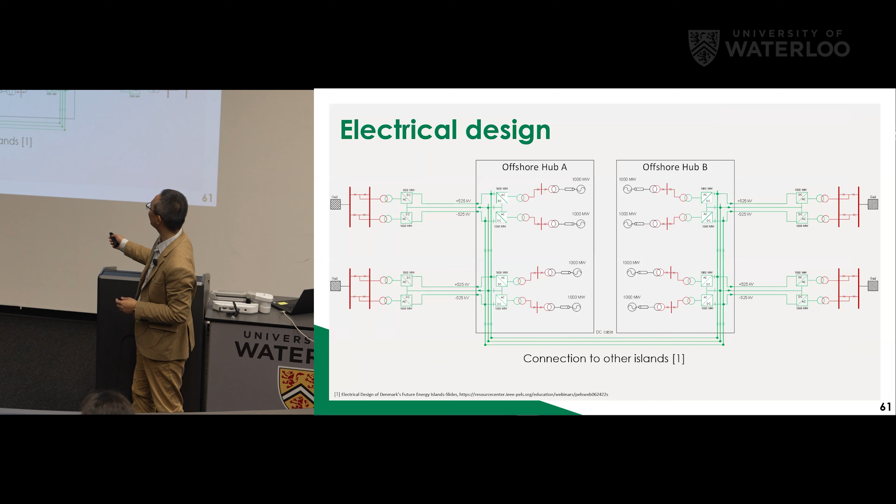But what about the wind turbines though? They are standing alone for maintenance, right? Yes, they need to send people by helicopter or ships to fix any problems there. You can see in the figures there are some port docks, so it should be ready to transfer the hydrogen produced on these cargoes, the vehicles to transfer this hydrogen to the grid.

Yes, please. I just have a quick question about this artificial island. What's the rationale behind building the converter station off the grid and just having the AC platform and the DC platform on the island? Why is the converter station not on the island?

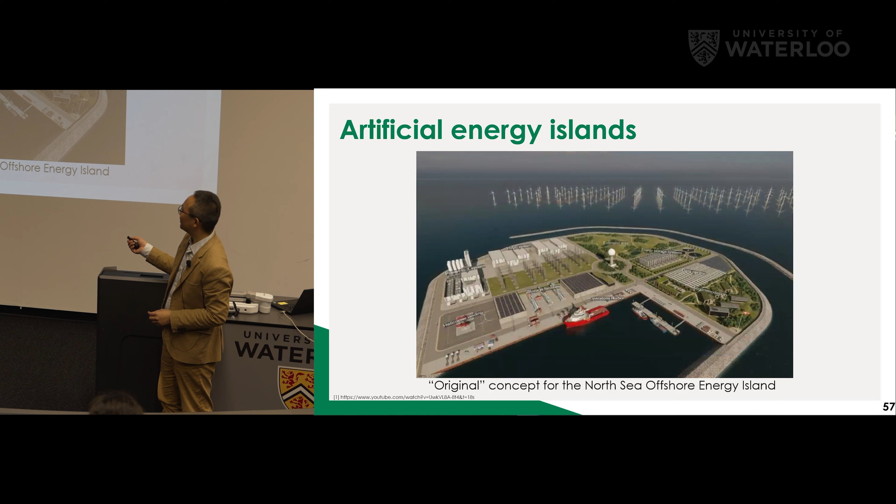Because it is still offshore. I think they have assumed this by calculation. For example, this HVDC converter station is already mature technology, originally from offshore oil drill platforms. They use this technique for the offshore converter station. So if you build it on the island, it is very, very heavy. Maybe the cost and the space, the volume, will be much more expensive than building it in the sea.

And are the connections to other countries already decided, which countries will be connected to this offshore island? I think this is still in planning with other countries. If you check the report, they mentioned these countries - UK, Belgium, yes, they have this interest, but they haven't signed the contract yet.

Yes, but what about Bornholm Island? Which one? This one has been decided to connect to Germany. They already have this assignment. You can check the report from Energinet. They mentioned that. The UK one, I don't know, but for this one, Germany has been signed.

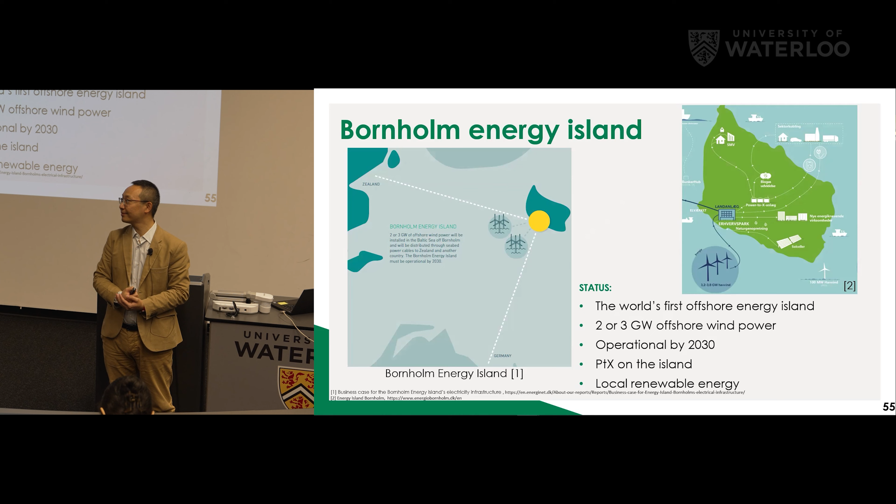Questions? Do we have any online questions? Nothing. Okay, any questions?